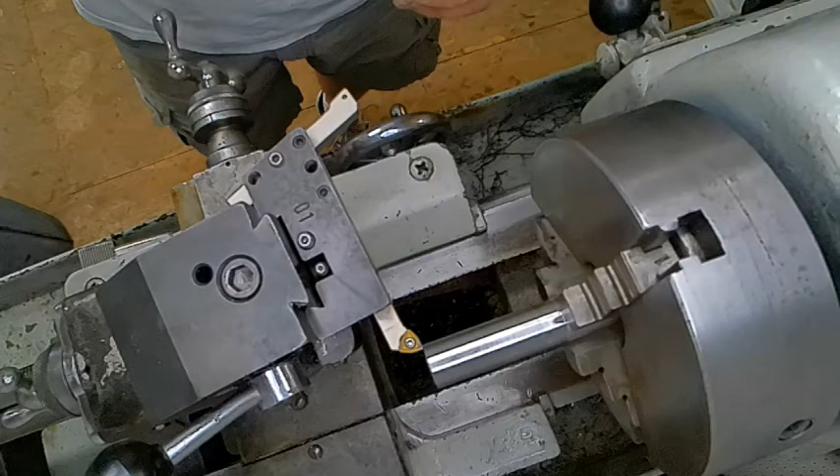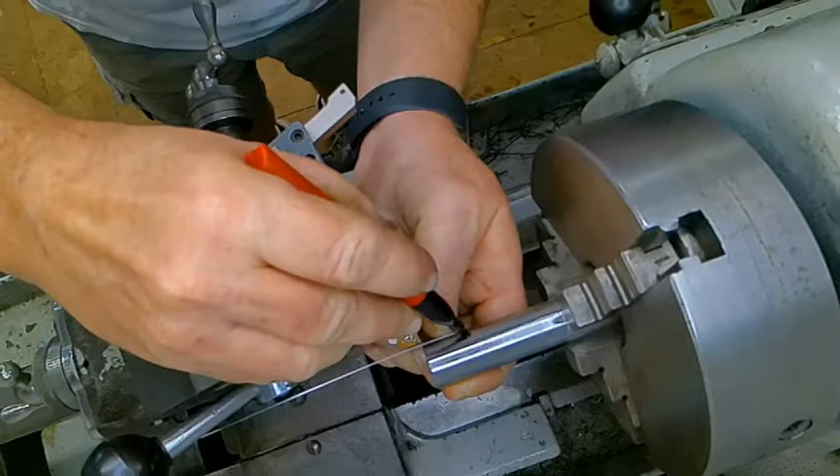Alright, I need to cut a journal 750 thousandths wide. Perfect!

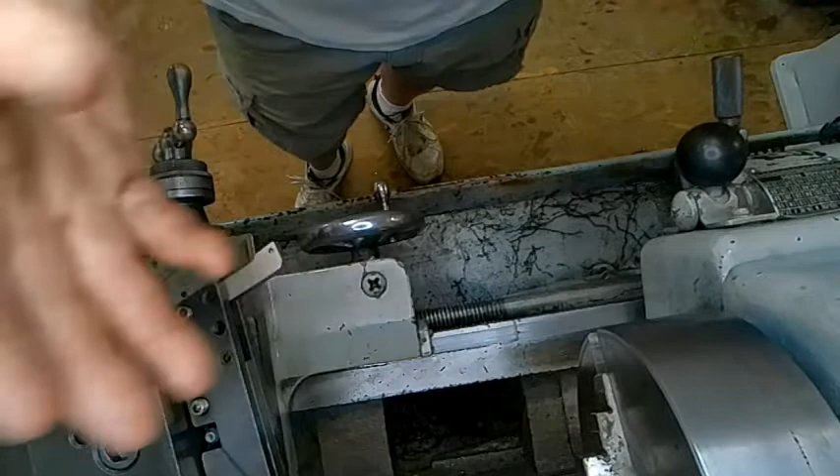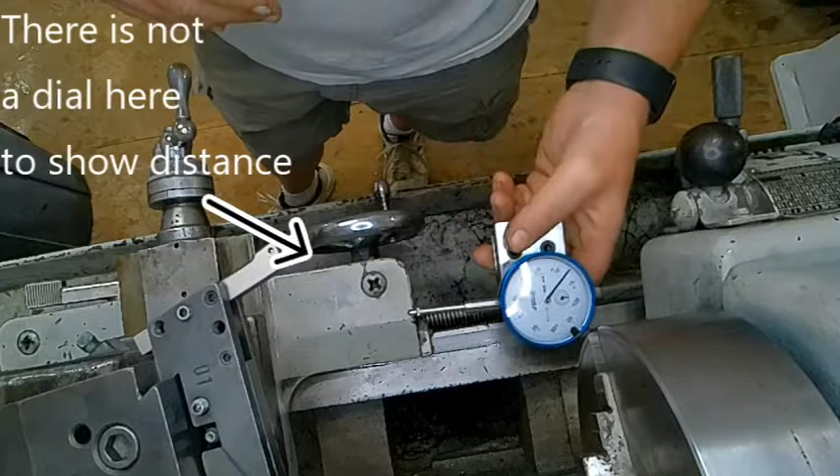On the Atlas lathe, trying to get exact measurements on your distances in case you need to cut a journal or just a specific depth that you need to go on your workpiece, it's very hard to put a dial indicator on this side.

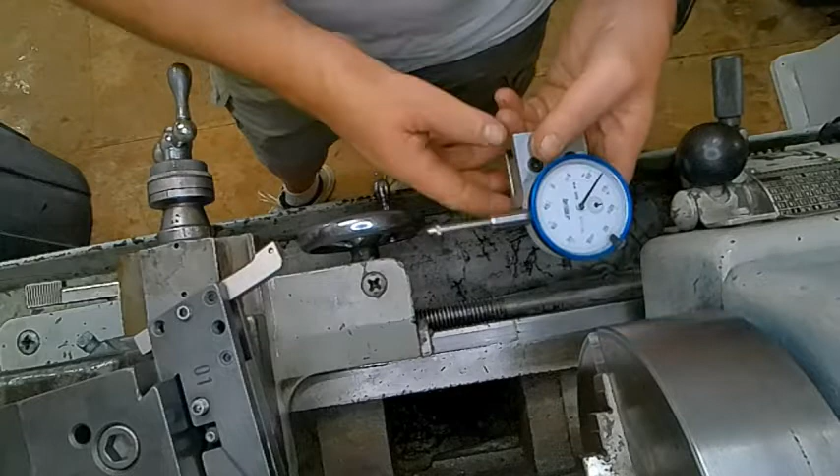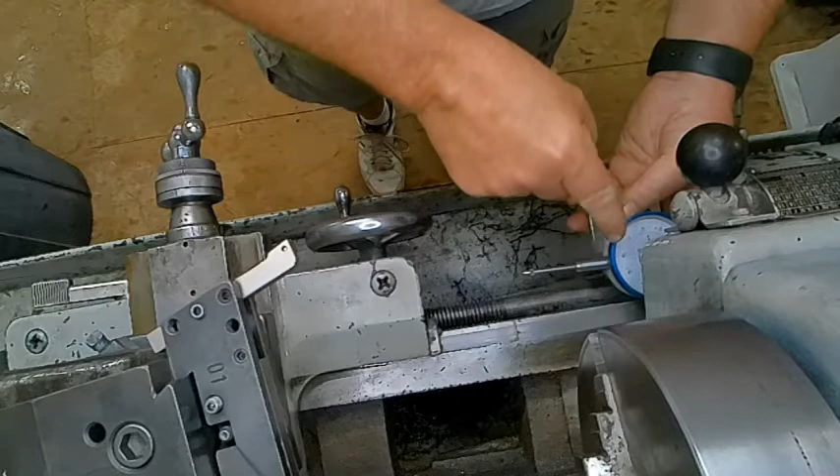Now, I've seen lots of videos on YouTube, I've read books about mounting a dial indicator here. They do make smaller face dial indicators. The issue I have is more along the lines of getting it under here and the distance between the carriage and the tip of the indicator, the plunger. If it were over here, it would be just fine, but I can't read it, and that's an issue, especially on these larger Atlas lathes.

Like others of this size, the headstock is pretty large and sticks over top of the ways about 1 3/4 inches, and then when you take the lever for the back gear drive, you're looking at almost 4 inches that it sticks over. So trying to put a dial indicator on this side is near impossible with getting a good reading.

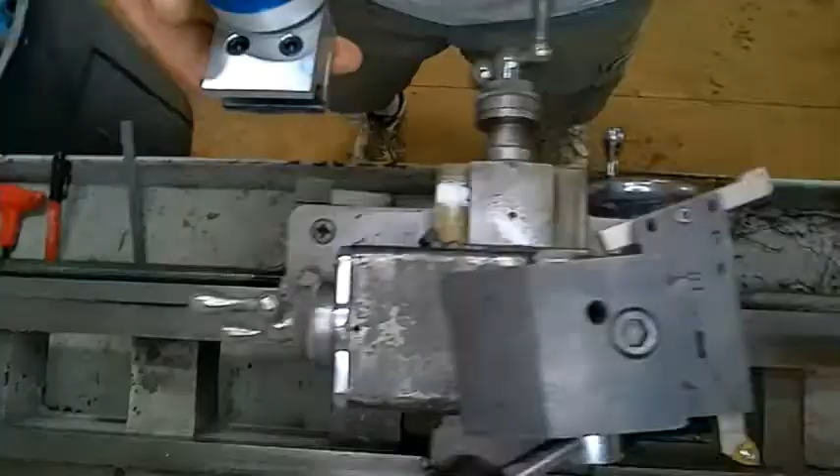And I've looked at tilting it like this, but this handle is still in the way. I did make this attachment and it fits perfectly on this side. So I've learned to adapt this with just a slight tighten here. We can make this a little more rigid.

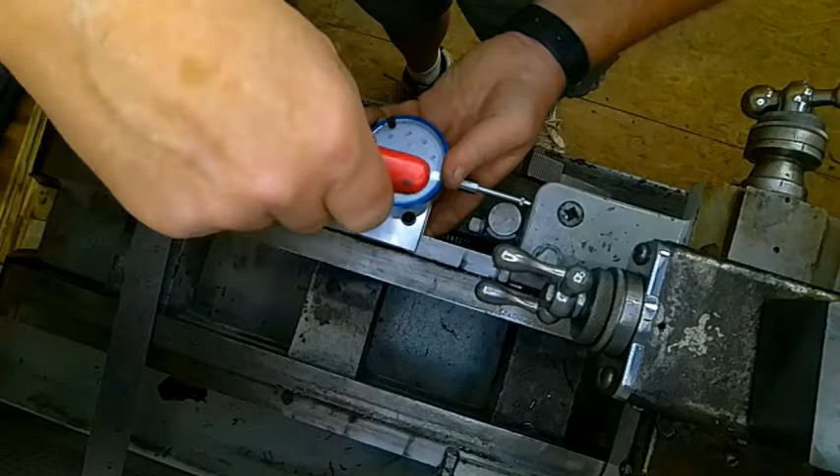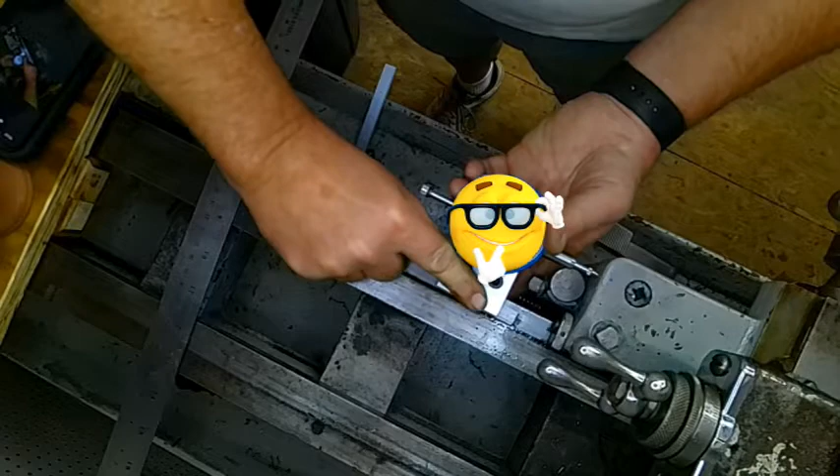And bring in, and I can bring it in. You're looking at the inner dial. I can bring it in past the amount of distance that I need. So if I need to go 750 thousandths, I can go to 800 thousandths on the dial, tighten it down, and I don't need to be on 0 because I can change my 0. Change my 0 and it's nice and rigid.

Tighten the bezel, and now moving 750 thousandths is merely just a matter of moving in 750 thousandths. That works. I want to be able to stop at 750 thousandths. So it would be ideal if I had an Atlas lathe work stop that is mounted right here.

I do not have that. That did not come with this. I don't really want to buy one.

I watched several videos. The one that inspired me the most, of course, is Mr. Pete Tubal Cain, Mr. Pete 222 on YouTube. He does an incredible job of explaining everything Atlas lathe. He has an entire series of Atlas lathe videos. I will link those in the description.

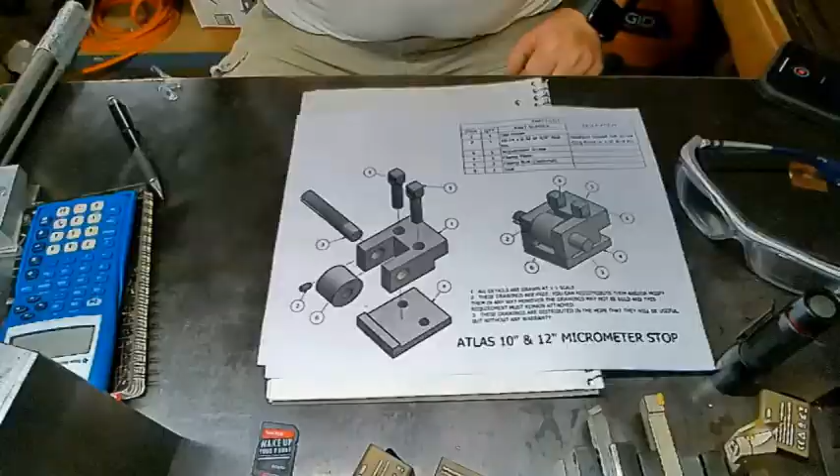He produced a copy or a mimic of a work stop that I am going to produce. I think the hardest part that I'm going to have in making this is this dial right here. And turning the dial's no worry to me. It requires some knurls. The hard part is going to be the graduations that we put on this, and that's what I'm going to focus on in this particular video, is putting those graduations on.

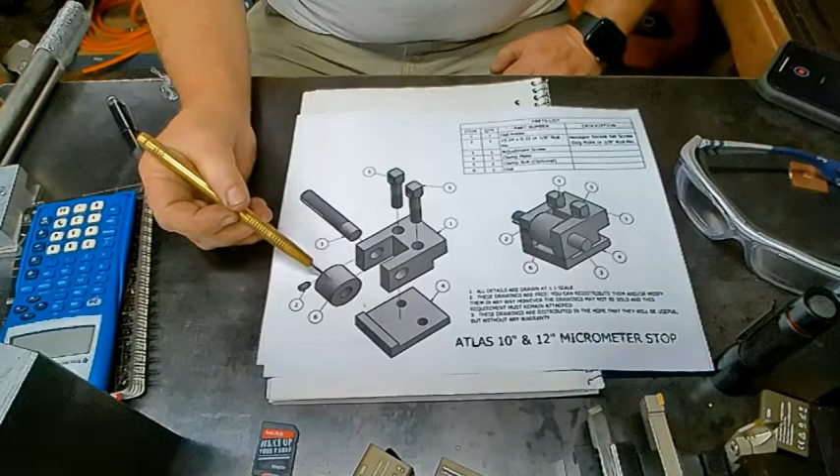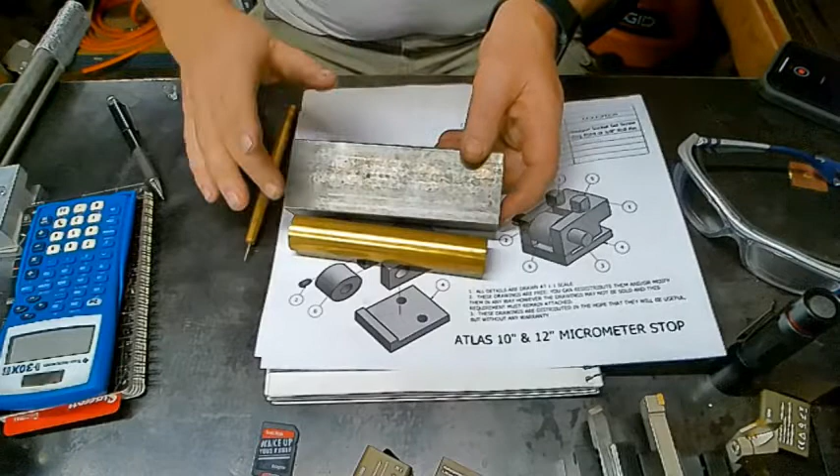Mr. Pete used aluminum for this. I'm going to use a piece of brass. I like the way that brass and steel look together, especially when the steel is polished up and the brass has got a little bit of polish on it. I like that look. That's what I'm going for.

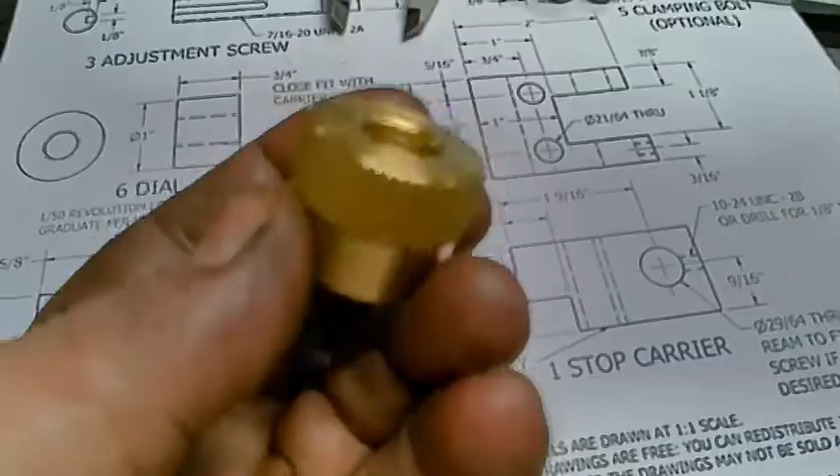The adjustment dial machine down. It is exactly 750 thousandths. Get a hold of it. 750 thousandths, right on the money.

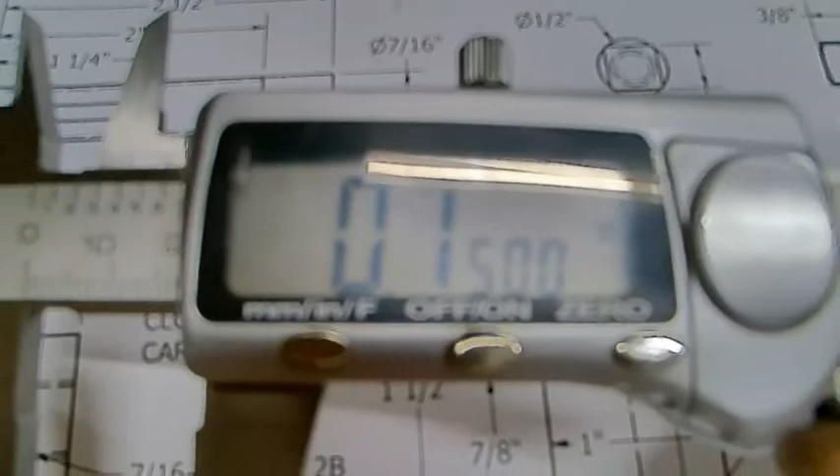Alright, now the hard part and the fun part. This is my new dividing head.

This is the first time I've ever had it out of the plastic and mounted on something.

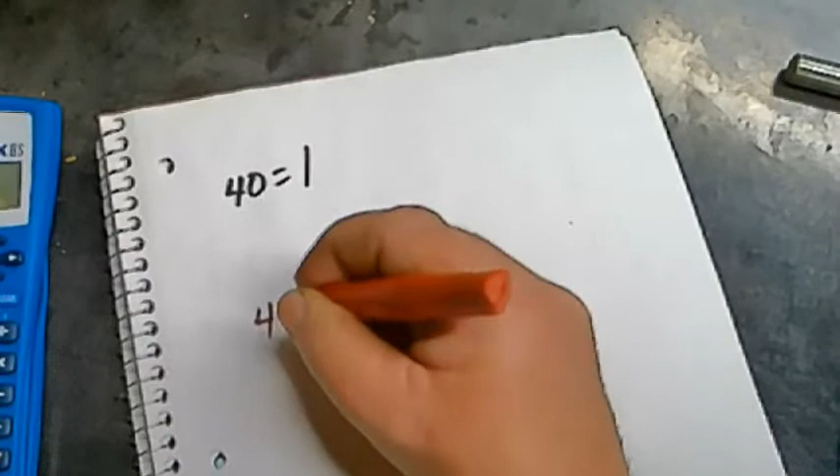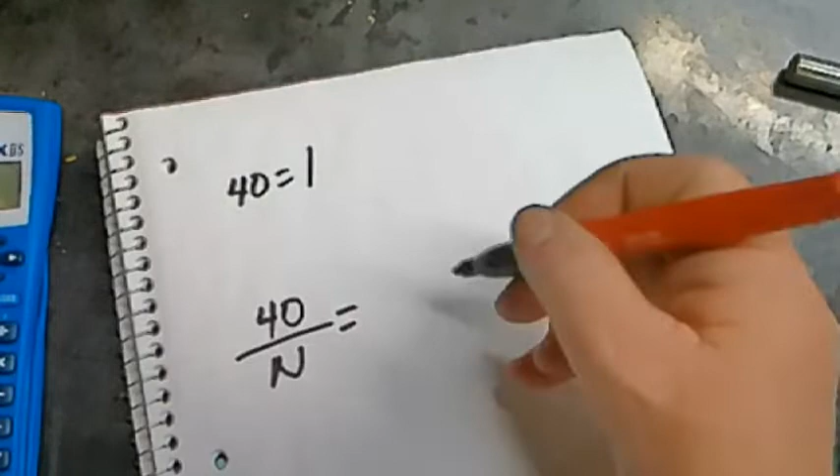Okay, just a short lesson in math for the dividing head. My particular dividing head is 40 revolutions of the hand wheel equals 1 full turn. So it would be 40 over the number of graduations that I want it to have. I'm going to put 50 graduations on it. So 40 over 50, I can reduce this fraction by getting rid of the zeros, dividing both by 10, equals...

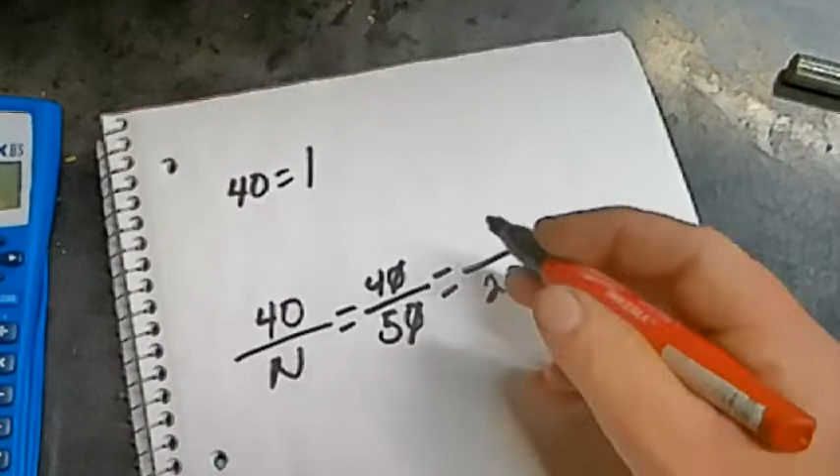4/5. I do not have a dividing plate with 5 on it, but I do have a dividing plate with 20. So 5 is divisible, or 20 is divisible by 5. 5 times 4 is 20. So whatever I do to the bottom, I have to do to the top. 4 times 4 is 16, and that equals...

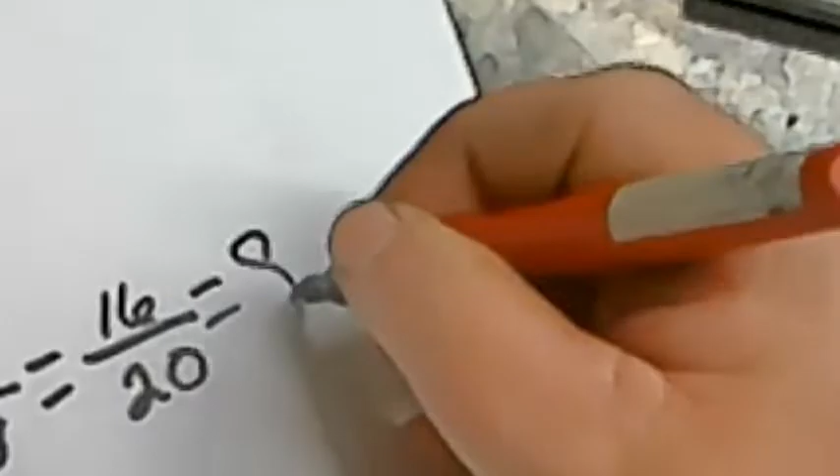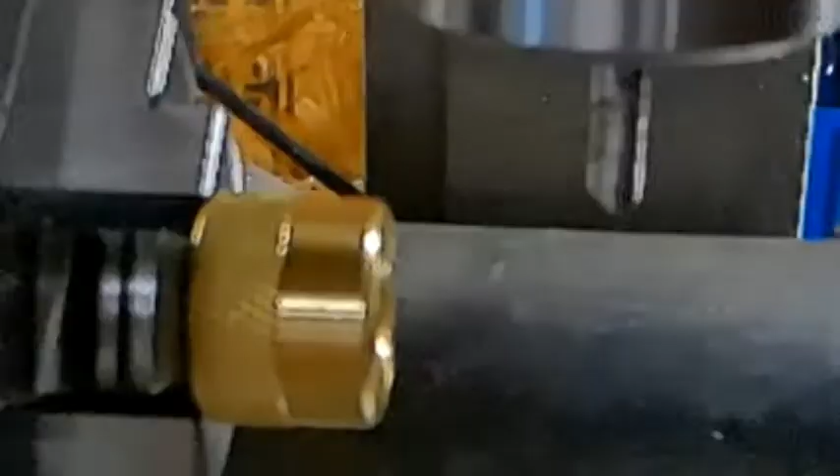This is just a piece of high-speed steel, a 1/4-inch drill. I have sharpened the other end to a point. I'm going to turn that point towards the work. I need to get it as straight by my calibrated eyeball as possible.

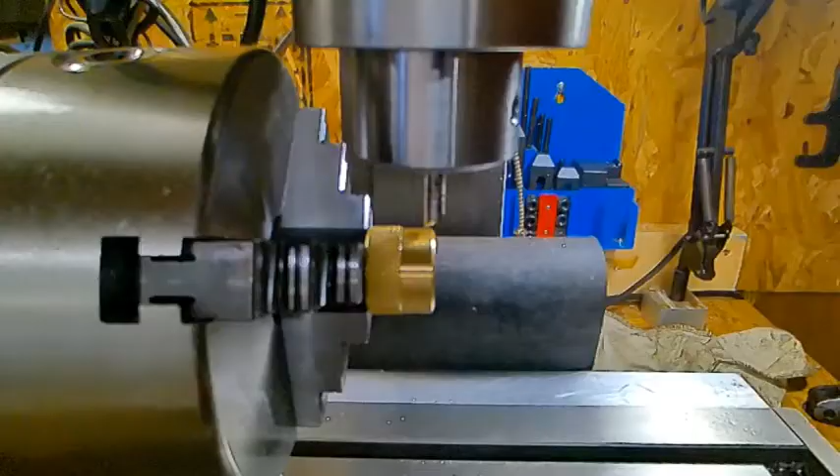I have a 5/1000 feeler gauge right here. I'm going to bring it down until that feeler gauge just grabs and slides. I know that that's 5/1000 above the work right there. Come down 5/1000, right at 10/1000.

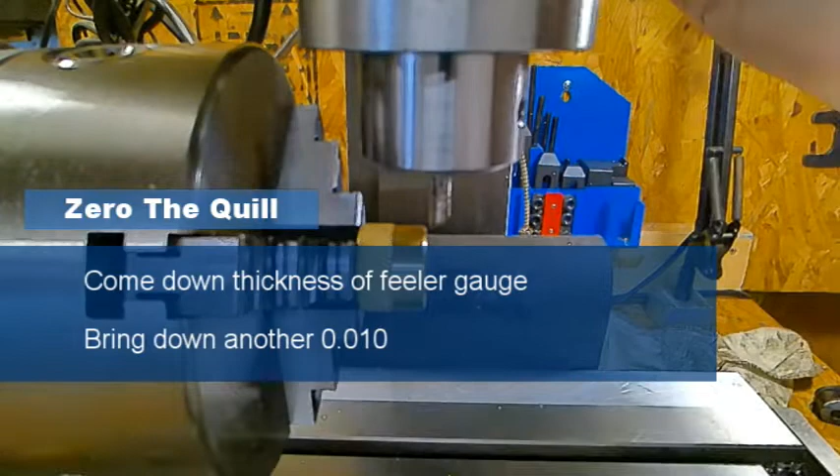Alright, next I need to zero my x-axis so that I can repeat my steps. Again, I'm going to use my calibrated eyeball as long as every piece that I do, every cut that I make is the same distance for the length of cut that it's supposed to be.

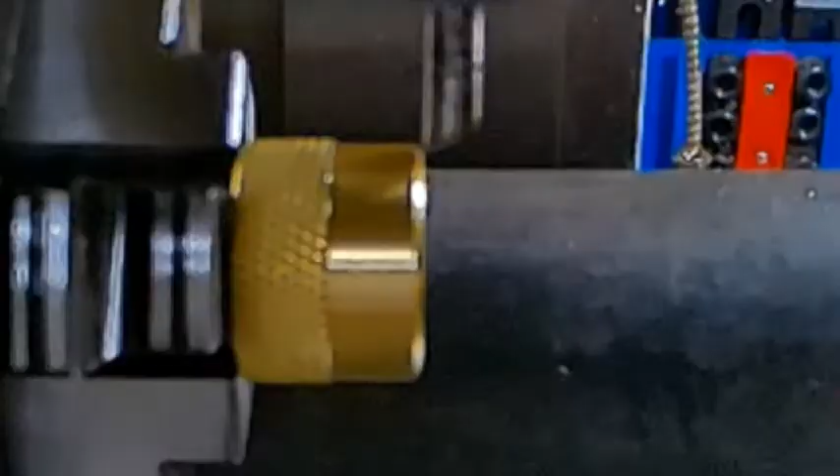Here goes cut number 1. This is going to come in 300 thousandths. I went 200, 260, 270, 280, 290, and 300. Bring it back out. There's cut 1.

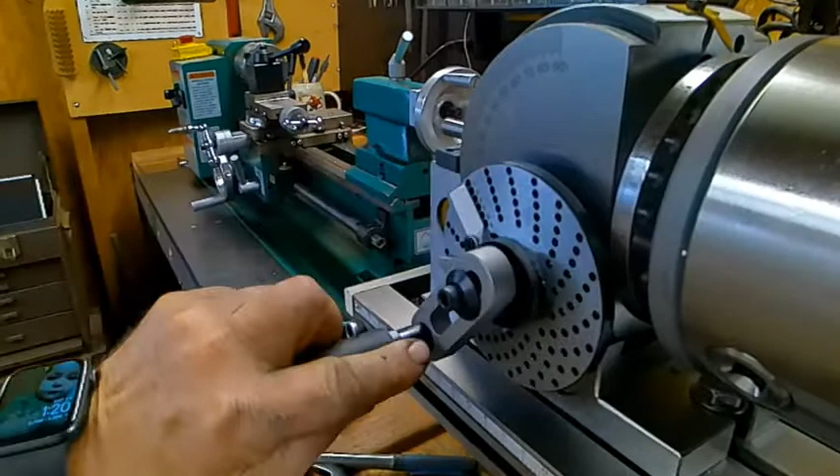Back over here. Okay, I've already set my divider. I'm going to move 1 full length, move my divider around, ready for the next cut.

This is going to be 150 thousandths. I want it to be exactly half. There we go with 100, 120, 130, 140, and 150 thousandths. Bring it back out.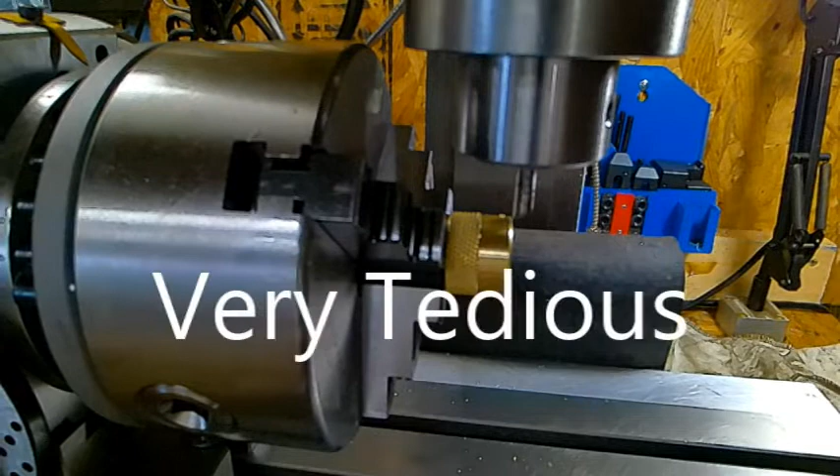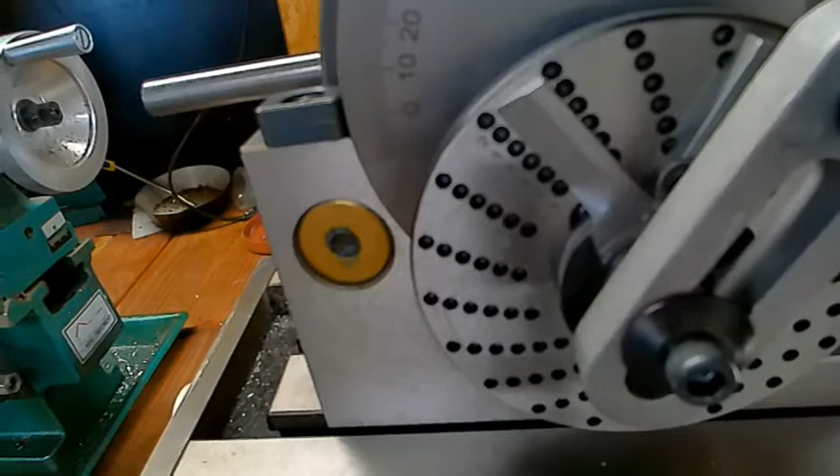Put my dial. I am on my fifth cut. Every fifth cut is a 300 thousandths long cut, and an easy way for me to remember this, and it just so happens the math worked out this way, because I'm using the 20 hole pattern and we're skipping every 16th hole, every fifth cut lands back at our starting point with our dividers. Worked out great. It helps me remember and pay attention to where we're needing to do the 300 thousandths cut. That doesn't mean I'm not going to mess up or make that mistake, but it does help.

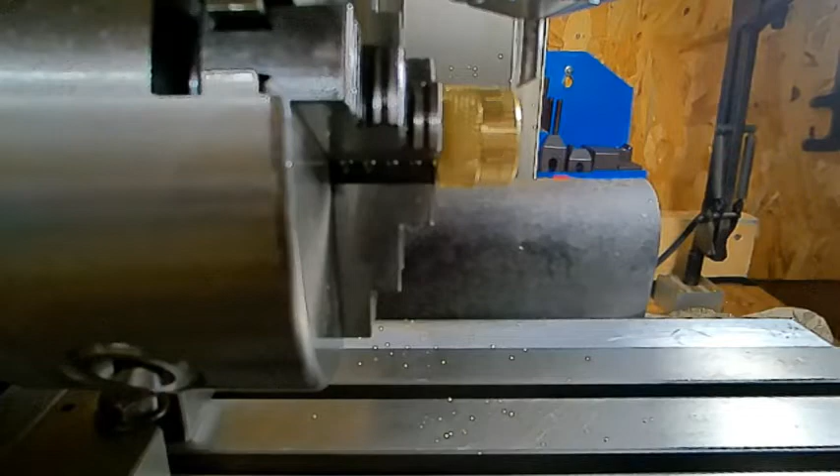Number 4. And let's see if we lined up. It is a moment of truth. And it is just cleaning out the cut that I made originally. Outstanding, I like it. Worked out fantastic. It's got some burrs.

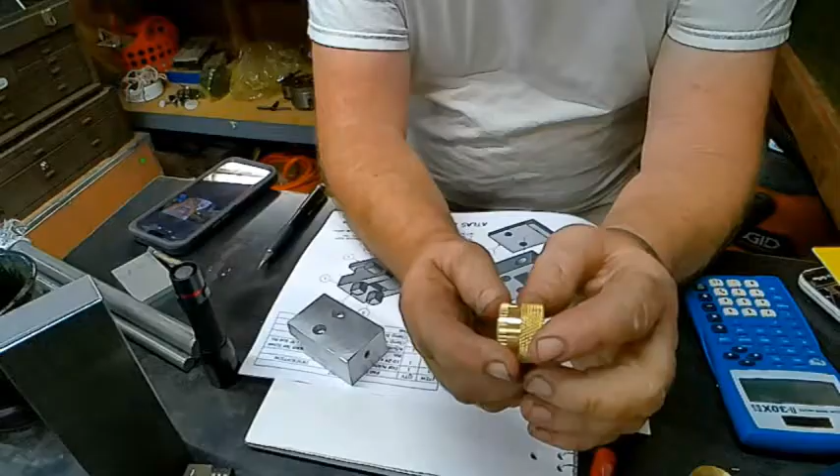A little bit of emery paper, we'll take that off. Looks fantastic. I am extremely pleased with the results. Probably the nicest thing I've made thus far using these machines. I've made some things that I enjoy, things that I like, but this is by far the most precision. The fact that I got this exactly 750 thousandths wide, chasing those zeros, that's what I started doing, and I enjoy it. It's very calming and relaxing to me. Here, turned out fantastic.